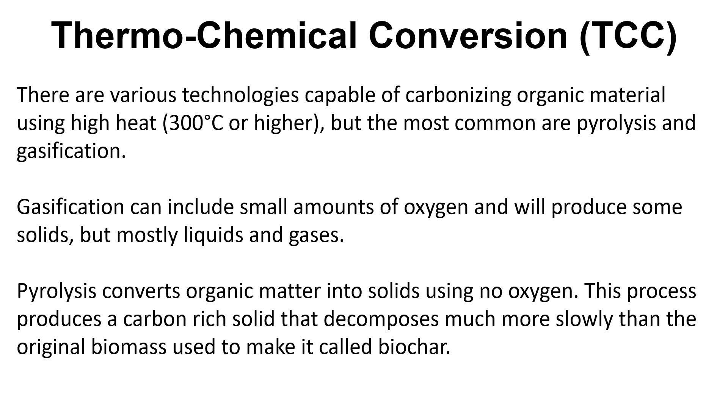So just so you can sort of visualize what one specific machine or process might look like as I continue talking about pyrolysis and biochar on dairy farms, this is just a little visual example. As Kathleen said, we're not promoting any specific companies here, but this is one company called Biomass Controls. They're out of Connecticut, and they work with another company called Native Energy out of Vermont. And this machine is an example of an on-farm pyrolysis kiln that they have on a farm in Connecticut.

And I think the farm has about 1,500 milking cows, and they're sort of just doing an experiment and mass energy balance work and seeing how effective this machine is at processing dairy manure. So they're able to process manure from about 200 cows with this.

And in the schematics, just to give you a sense of how it works, they collect the manure from a storage pit that's below the milking barn. So this is all the manure, the liquids, maybe any bedding that might be mixed in, the solids, everything. And then that's sent to a separator shed or maybe a storage shed. And then they screw press it. So that reduces the moisture from about 90% to between 60 to 65%. And then they take the separated solids from there and use it either for bedding or pyrolyze it.

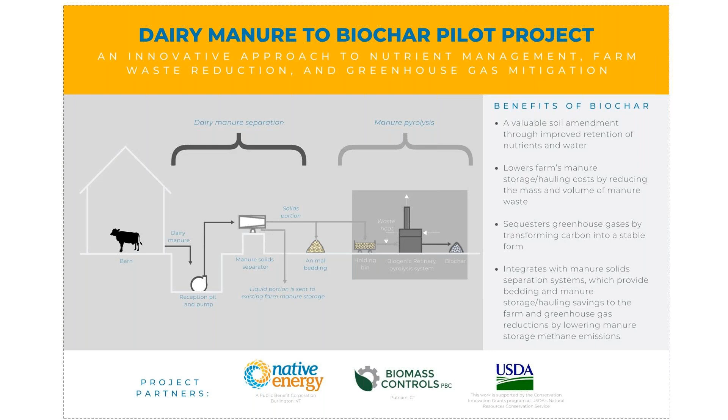Next slide. Okay, so now that you know, maybe, hopefully, as well. Sorry about that. No, that's okay.

I can keep talking. Now that you know kind of what thermochemical conversion is, and specifically pyrolysis, and you have a sense, maybe you can visualize in your mind now what the process is like on an actual dairy farm, I'll talk the rest of the time about the benefits and uses of biochar on dairy farms. And there are a myriad of them. I won't be able to talk about all of them. So if you really are excited about this, I'll encourage you at the end to check out that synthesis report that Kathleen and I worked on.

But just quickly, and for all of these topics, I'll have a slide that goes into a little more detail. As I mentioned previously, thermochemical conversion is a great manure management strategy in terms of volume reduction and more. Also, biochar can be beneficial for cow health and water quality. There's other benefits that include composting and anaerobic digestion. I'll get into that towards the end. And the use and production of biochar can help address climate change issues on and off farm, and have some positive energy benefits that I think the other panelists will probably get into more details about.

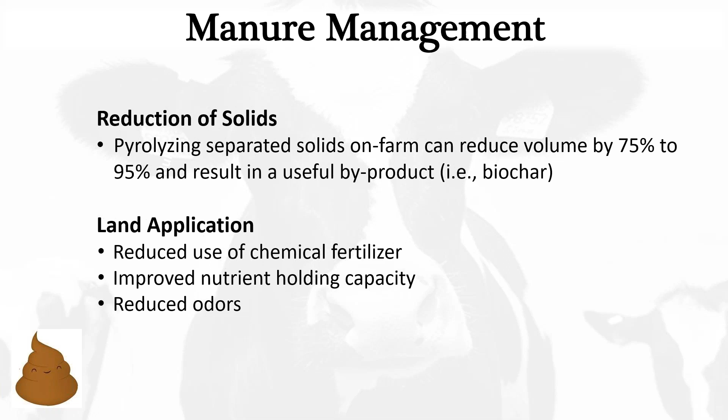So here's one example of that, where this farm in Vermont, Shelburne Farm, used biochar to reduce odors from their manure slurry pit. So they spread a big truckload of biochar on this 1,300 cubic meter manure slurry pit, and they immediately noticed reductions in odors after the biochar started to develop a cake on the top.

They're not quite a research farm. They're an operational dairy, but they do a lot of research and experimentation. And although this wasn't a peer-reviewed study, the farm management definitely saw that biochar reduced the odors, and they're going to continue doing this in the future.

And the reason it works is because the biochar creates a barrier that reduces the volatilization of ammonia and other odors. And I know, after having interviewed and spoken with a lot of farmers in New York State and elsewhere, that odor is super important for dairy farms. They're a part of the community. They don't want to upset or offend anyone, the neighbors. So this could be a really important use of biochar.

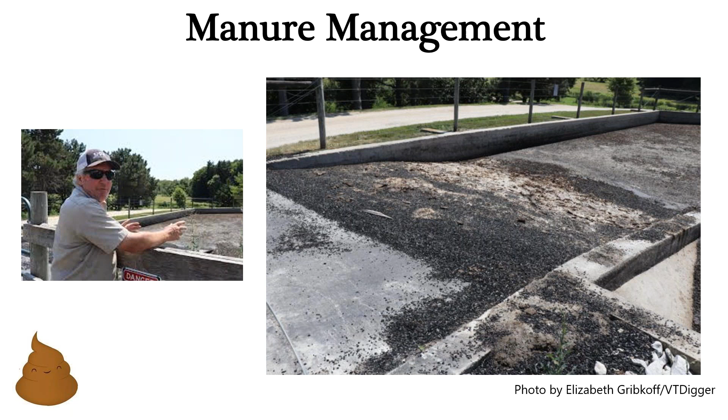So also, studies have found that adding small amounts of biochar to animal feedstock can improve herd health. A lot of work has been done in Europe and elsewhere, not much research in the US yet, because the FDA makes you jump through a lot of hoops with that. But elsewhere they found you could actually make biochar with the dairy manure and then reincorporate that into feed.

And early findings suggest that when biochar is added to feed, and it can be other biochar too, it could be woody biomass or crop residues, the cows finish eating earlier. The farms tend to have lower vet bills. There is a reduced reliance on pharmaceuticals and disinfectants, and the methane emissions from cows are reduced.

So when you add biochar to the feedstock, the cows essentially are less flatulent, they fart less, so you reduce methane emissions. Also, biochar, kind of like activated carbon, can act as a binder in feed. So it reduces certain mycotoxins that can be found sometimes in animal feed, and that can contaminate the milk and meat.

Now, not a lot of really rigorous studies have been done that compare the use of biochar in dairy bedding to other current bedding options like sand or sawdust or lime or gypsum. But some research has been done, and a lot of just use on farms has been done. So there's this sort of common sense research, I guess you might call it.

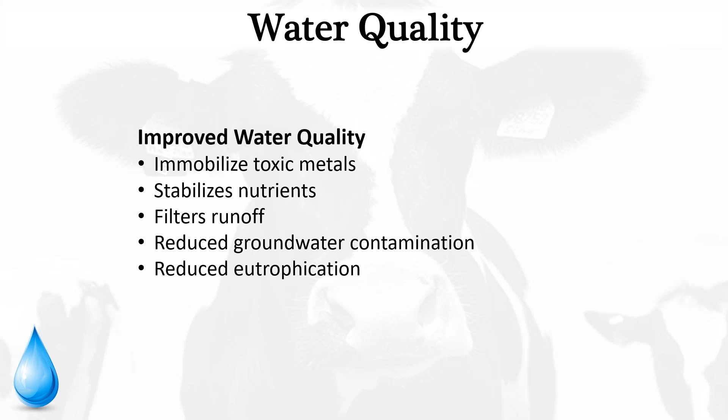So, climate change. I think with our new administration, we're going to see climate change become a really large political goal of President Biden's. Even years ago, before he was running, he always talked about addressing climate change and particularly focusing on farms and soils, because he saw great potential in agriculture to store carbon in the soil. It covers a lot of land, and there's other things you can do on farms to reduce carbon emissions, including changing tillage and such.

But biochar particularly has been recognized by the IPCC and other organizations as a carbon sequestration technique. And also, we mentioned this in the synthesis report, the US dairy industry launched a net zero initiative, net zero meaning carbon emissions, with the objective of becoming carbon neutral or even carbon negative by the year 2050, which is practically around the corner. And so thermochemical conversion and biochar, particularly on dairies, can help reach this goal.

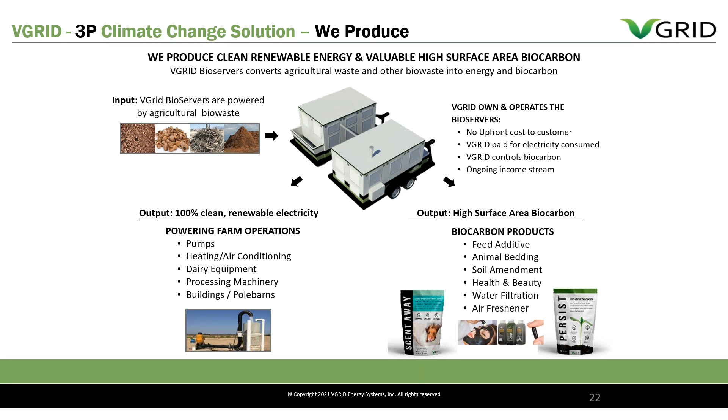That combustion reaction produces a lot of heat. It's exothermic. That's why you feel heat when you sit around the campfire. And we get temperatures in that combustion zone of up to 1,300 degrees centigrade. By not giving it all the oxygen it needs, you're left with a lot of carbon, very hot carbon. And so as that hot carbon drops below the combustion zone, it enters what we call the reduction zone. And this is a very critical part of the gasifier.

This is where the combustion byproducts of CO2 and water vapor are converted into hydrogen and carbon monoxide. Those gases are combustible and can be fed into the engine to make electricity. And as that carbon sits in that reduction zone, it becomes more and more porous the more those combustion products interact with that carbon. We can control the time spent in that reduction zone by our activated grate mechanism at the bottom of the gasifier. And then finally, carbon comes out the bottom of the grate and is augered out into a super sack next to the gasifier. Next slide.

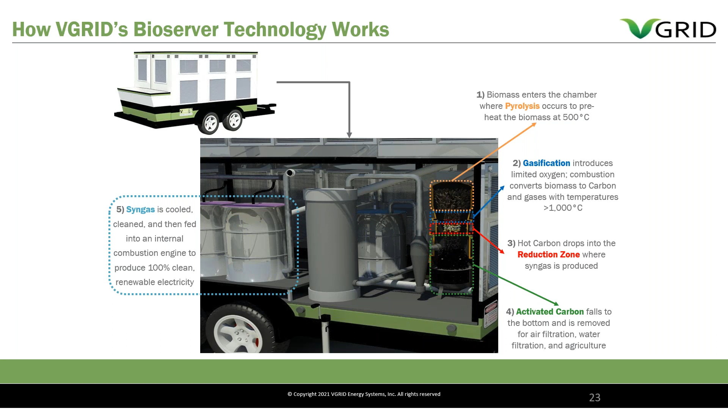I can cover this very quickly because Shannan did a great job on this. Big differences here are pyrolysis consumes energy. You need to put energy in to heat up the biomass, whereas gasification actually produces energy because it's an exothermic combustion reaction. No oxygen is used with pyrolysis. We introduce a little bit of oxygen through the air. You can see there the temperature differences. Shannan did point out that the yield, the amount of char as a percent of the biomass, tends to be higher, and that is correct. Next slide.

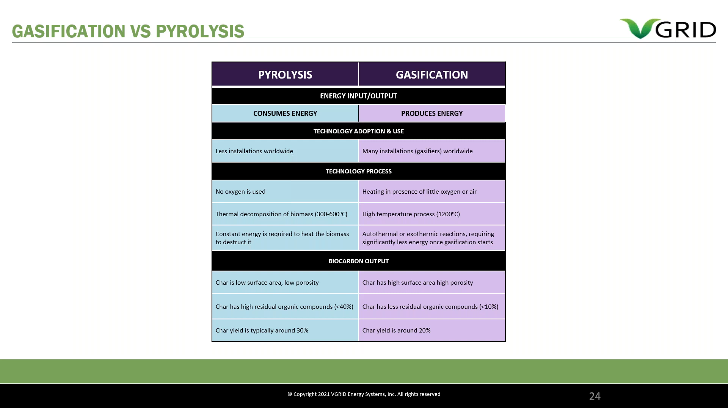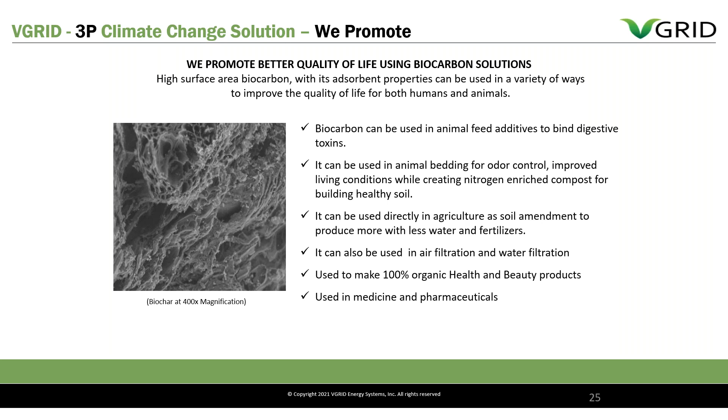So the biocarbons are very important to make the whole business model work, and they'll be important for a whole bunch of different applications, and I won't spend time going into those because I think Shannan did a great job covering that. But what I want to touch on here is the porosity, the large surface area. We produce 400 square meters per gram in some cases, and that's your sponge that absorbs odors or toxins or water. So let's go to the next slide.

What I want to focus on here is what I call manure management solution for a dairy. We're currently operating at a dairy in Central Valley, California. It's actually a 2,000 cow dairy, but I use 200 cows here because it fits with one single gasifier that I've shown you earlier. And I apologize right away because I made an error on that amount of manure in gallons per day. That should be 2,800 instead of 1,400. But 200 cows produce 2,800 gallons per day of manure. That goes into a lagoon for storage.

And if you look at the dry portion of the solid matter, that's about 2,800 pounds per day coming out. As Shannan mentioned, manure has very high moisture content, so it needs to be dried. We then pelletize it as well and put it in the gasifier. And so in a single day of operation, which would be about 14 hours, we can generate 1,500 kilowatt hours of electricity and 600 pounds of biochar.

And if we take a portion of that biochar and put it back in the lagoon, as Shannan pointed out, we can absorb ammonia, hydrogen sulfide, and methane. And the ammonia absorption is very important because typical lagoons lose 50 to 80% of their nitrogen through ammonia formation and evaporation. So if we can trap that nitrogen and put that nitrogen back in the soil, it makes that manure a much better fertilizer. So let me go to the next slide.

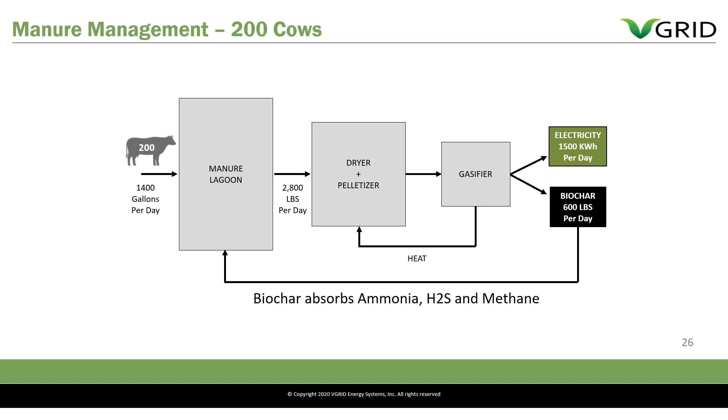This was an early trial that we did at the dairy. We typically run pistachio shell at that dairy because we can get it for free. There's a nearby processing plant that produces large amounts of waste shell. The advantage of the shell is the very, very low moisture content. They have very, very low ash. And so they're easy to handle, easy to manage.

And if we want to do further things like activate it for a water filter or an air purifier, they're much easier further activated because of the low ash. And you can see there, the manure pellets, we were able to get them dry just in the sun. In California, we have that in abundance in the summertime, to 7%. You can see the much higher ash content in the manure itself. But the calorific value, if it were dry, is actually larger than the pistachio shell.

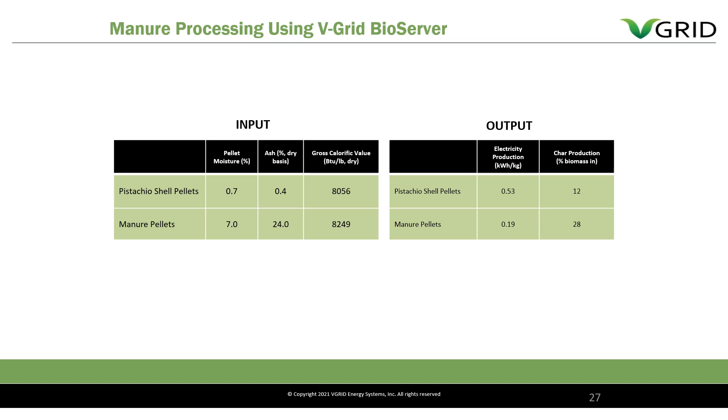And if you look at the biochar and the electricity produced, you can see two things. One, pistachio gives you actually more energy per kilogram than the manure, but you produce less char, so 12% biomass. So the carbon is being converted more into syngas, which gives you the more energy. And the moisture is lowering the combustion temperature for the manure, which is why you get less syngas, less electricity, but more char. Let me go to the next slide.

Now, if we compare the gas between the two, you can see that the manure produces less combustion gas. Hydrogen is about the same, but CO is noticeably lower and CH4 is noticeably lower. But the good news is the char itself is actually comparable, except for the ash. So the density is about the same. The BET, which is the surface area, in this case, was 278 meters squared per gram.

And even though the ash is high, if we're going to put it back in the lagoon and then put it in the soil, it's good ash, as Shannan said. It's got potassium and phosphorus in it. And by trapping the nitrogen from the ammonia evaporation, we will also be nitrogen rich. So let me go to the next slide.

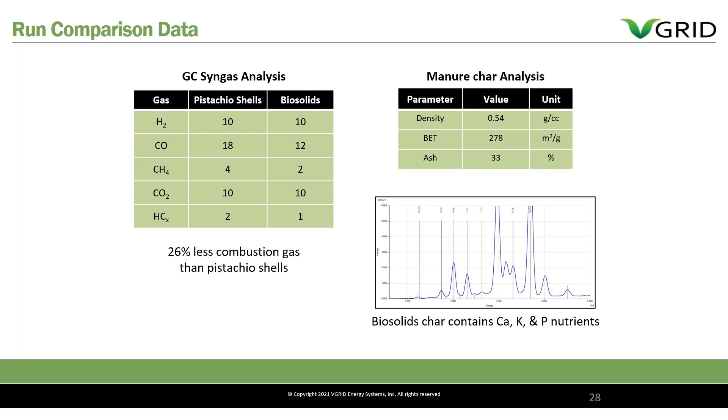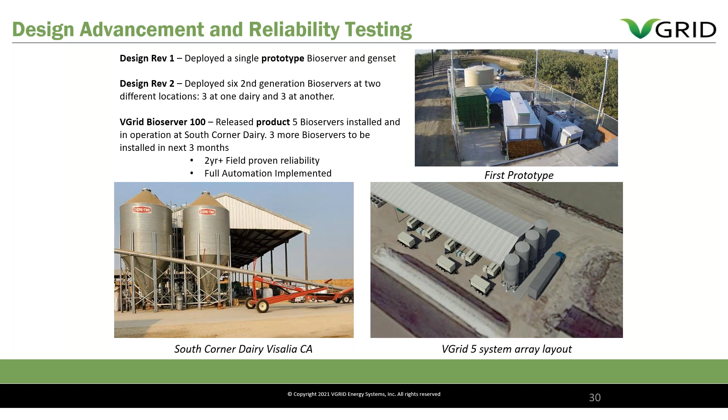And then that led to the final release product. And we now have 5 bioservers installed. You can see a pictorial of that in the bottom right. And 3 more are being installed in the next 3 months. And we've worked to fully automate the operation of those machines. So with that, I'll go to my last slide and conclude.

So in summary, we've developed field-proven mobile gasification technology that can produce low-cost, on-demand renewable electricity. We've developed valuable biocarbon products that have been tested and accepted in the market. We've verified that you can use manure as a feedstock, but I will stress we don't have a lot of data on that in terms of doing it day in, day out. It was really just a quick test, which produces biochar with good surface area and important soil nutrients.

And then finally, our technology is environmentally friendly in producing renewable clean energy while reducing and removing harmful gases which can cause climate change.

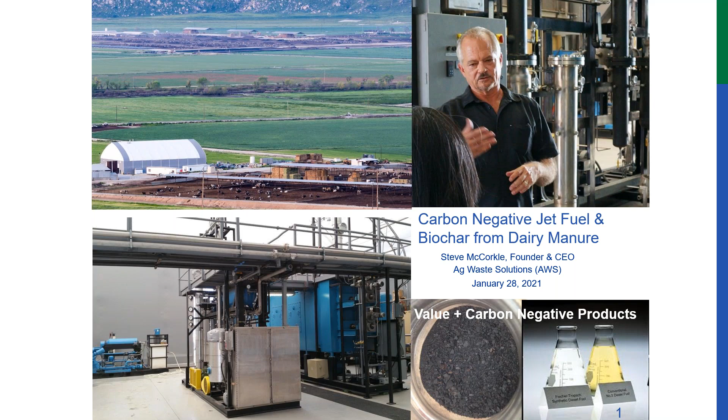In 2013, we obtained the first South Coast permits for manure pyrolysis plus biofuels production and enabled 26 dairies in the Western Riverside County Ag Coalition to renew their CAFO operating permits for another 5 years. In 2015, we produced the first ever sulfur-free Fischer-Tropsch or FT diesel and jet fuel from manure. And in 2016, we were invited to the White House to accept an EPA Nutrient Recycling Challenge Award for our work with manure-derived biochar and biofuels. In 2021, we will commercialize our carbon regeneration center and microbial refinery model for jet fuel and biochar production. Next slide, please.

The major issue and opportunity we want to focus on today is the fact that aviation and agriculture together contribute about 13% of global greenhouse gas emissions. Biochar is certainly a viable solution for the ag part, and I'm not going to be talking about the biochar part today. However, biochar production is expensive when the co-products produced are of low or no value from the roughly 50% of the carbon that is still contained in the syngas of biochar production.

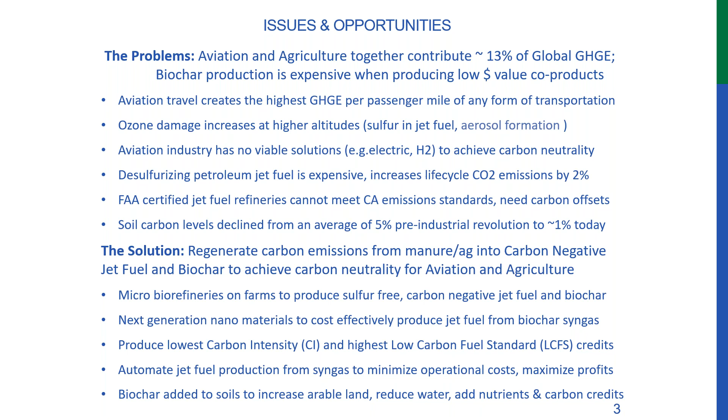And the liquid diesel fuel can power the farm equipment that harvests the crops grown with the biochar. The wax is sold to an FAA-certified jet fuel refinery for the final refining and FAA certification process. And then the closed-loop zero-waste carbon regeneration cycle begins again.

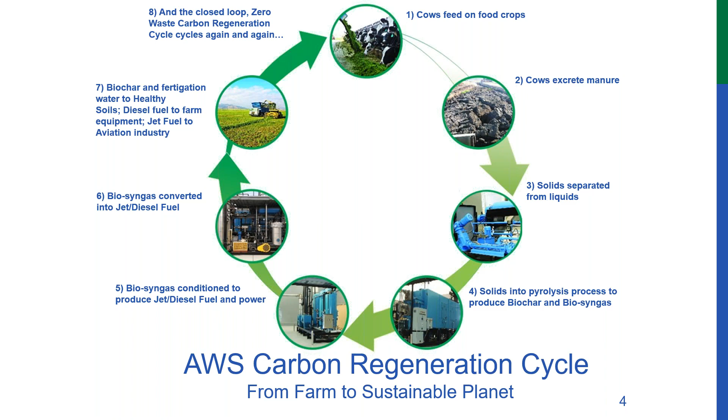I should point out here that our primary products of biochar and jet fuel in the form of wax have indefinite shelf lives, a major advantage in balancing production versus inventory forecast, especially for our offtake partners. The process also produces fertigation water, potable water if needed, and parasitic power for the system, all of which reduce the carbon footprint of the operation by reducing or eliminating the external purchases and carbon.

The process can also convert anaerobic digester biogas, landfill gas, or any type of flare gas into jet fuel. The system can work alongside a digester. I think Shannon mentioned this as well, to convert the greater than 50% of the manure carbon that remains in the digestate into biochar and jet fuel, converting the digestate liability into revenues and profits.

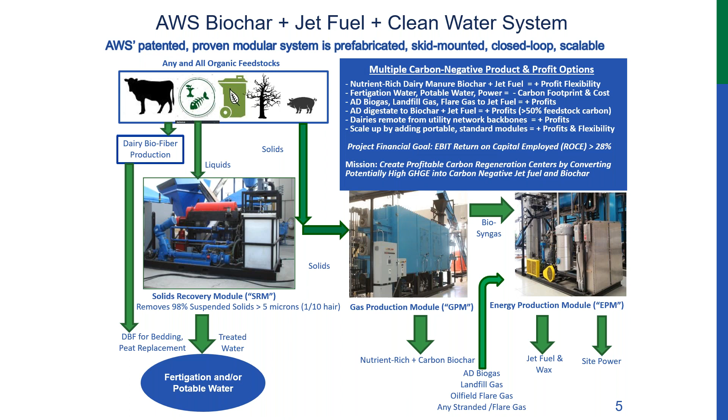Projects scale up by adding portable, standardized modules operating in parallel, either on a single site or dispersed amongst several sites. You can see that our project financial goal is to have an earnings before interest and taxes, return on capital employed, which is called ROCE, of greater than 28%. Next slide, please.

Fuels with CIs above the standard, the line here, generate deficits, and fuels with CIs below the standard generate credits. And of course, we plan to generate substantial credits with our manure-derived jet fuel. Next slide.

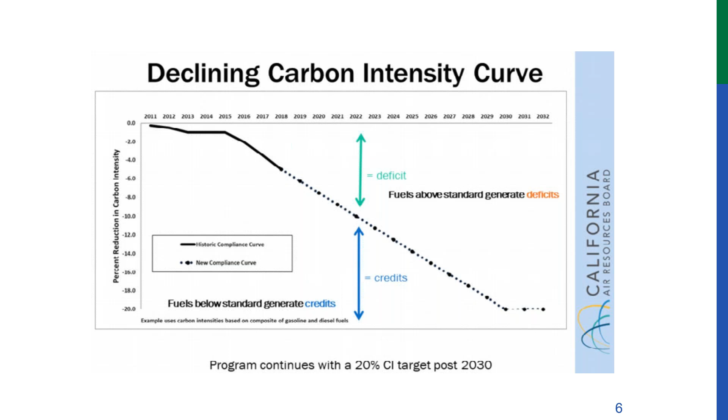And I should point out here that fuels must be transported to California to qualify for LCFS credits, and jet fuel is easily transported to California from anywhere in the world to obtain these credits. Much easier than transporting gas and other materials. Next slide,

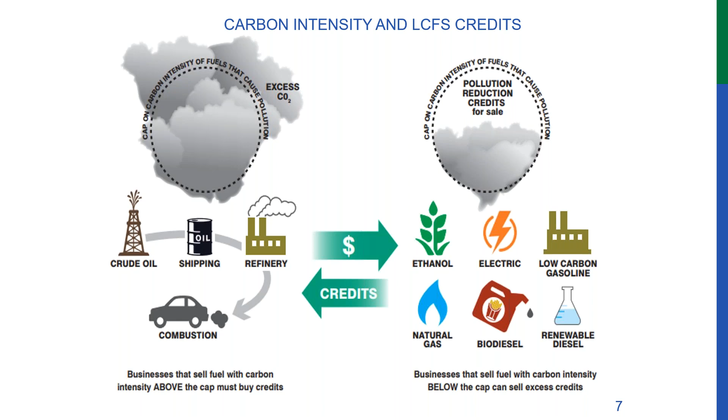Lower CI scores are more favorable because they are the cleanest life cycle solutions and therefore earn the highest LCFS credit values. So I've drawn in a forecasted CI value for FT jet fuel from dairy manure. You can see it there in the middle in green. It's about minus 410, and this is an estimate on our part because the pathway doesn't yet exist.

But FT jet fuel is, like I mentioned before, the cleanest burning jet fuel on the planet. And if you look at the CI standards on the right for FT diesel fuel, you see that it's positive 15 as compared to petroleum diesel fuel, which is somewhere right around plus 100.

So the FT jet fuel can be produced from a variety of feedstocks. However, manure is the most carbon negative feedstock, as evidenced by this minus 287 carbon intensity in the bolded diamond for the bio-CNG category. So we believe that this FT jet fuel will have a CI of less than minus 400, producing the highest LCFS credits and the highest fuel sales of any transportation fuel in the LCFS system. Next slide.

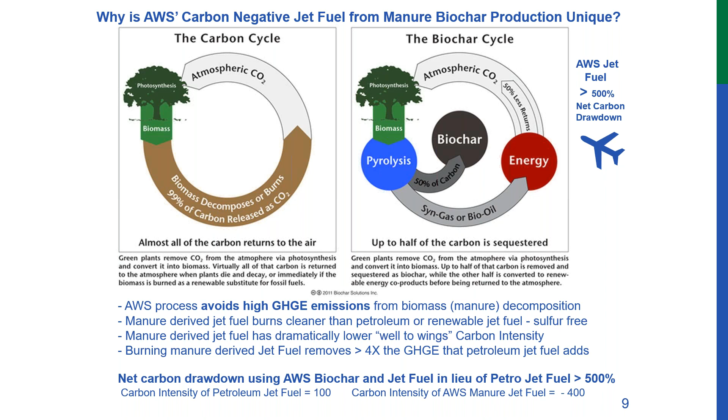The carbon intensity of petroleum jet fuel is about positive 100. And the CI of our jet fuel, like I mentioned before, will be somewhere around minus 400. So burning manure-derived jet fuel removes about 4 times the greenhouse gas emissions that burning petroleum jet fuel adds. So that means that the net carbon drawdown of AWS manure-derived jet fuel as compared to petroleum jet fuel is about 500%. Next slide.

So why is the AWS solution unique? So first of all, we have an economically viable build, own, and operate solution for animal farms with a profit-sharing program for host sites to help drive shared profitability goals. We offer the most carbon negative and most profitable dual revenue solution from biochar production. We locate these micro biorefineries at the feedstock source, eliminating the highest cost of biofuels production, which is the transportation of the feedstock to the central plant.

Our offtake products are energy dense, volume reduced, reducing offtake transportation costs and increasing market reach. Being permitted in South Coast means that we can be permitted basically anywhere. And our closed loop, zero waste micro biorefineries can be completely independent of utility company grids. AWS's graphene-based gas to liquid technology offers the highest conversion rates of syngas to jet fuel of any system known, with high automation in terms of running it and very low OPEX for the jet fuel part of the equation.

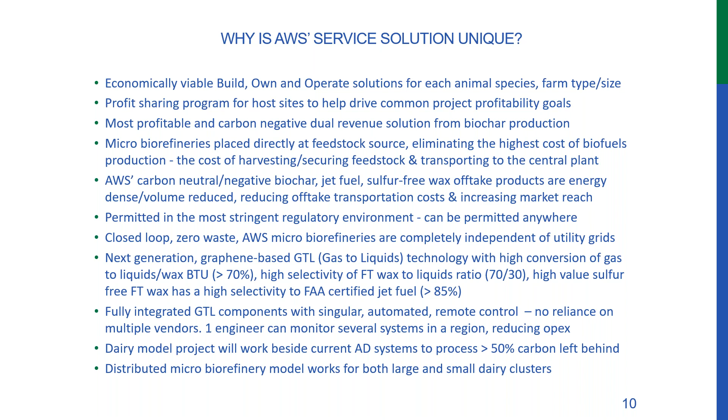So this dairy model will work alongside current digester systems as well to convert that 50% of carbon that's still left behind for the farmer to deal with into jet fuel and biochar, solving a lot of the problems that the farmers typically have with the digestate. And a distributed micro biorefinery model works well for both large and small dairy clusters. Next slide, please.